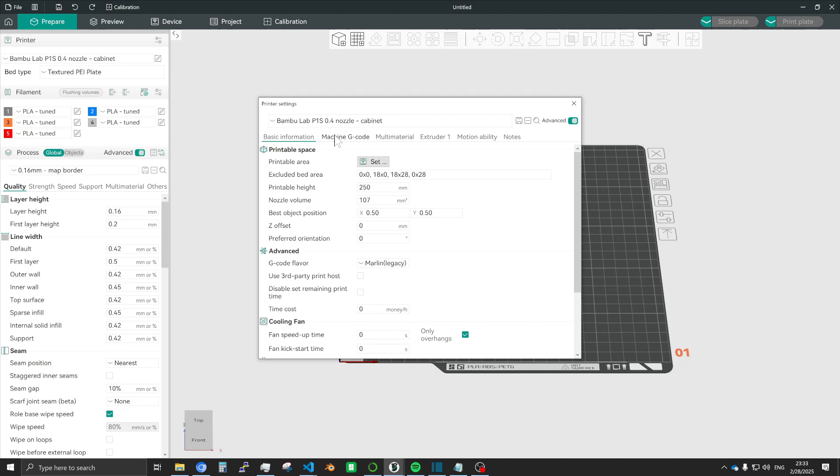You'll need to change some printer settings in your slicer so that MFM can find certain features inside your G-code. Go to your printer settings in your slicer and click the Machine G-code tab. Scroll down to find the Layer Change G-code option, and at the very end of Layer Change G-code, type in ;MFM Layer Change End. Next, go to the Change Filament G-code, and at the very beginning, add the line ;MFM Tool Change Start.

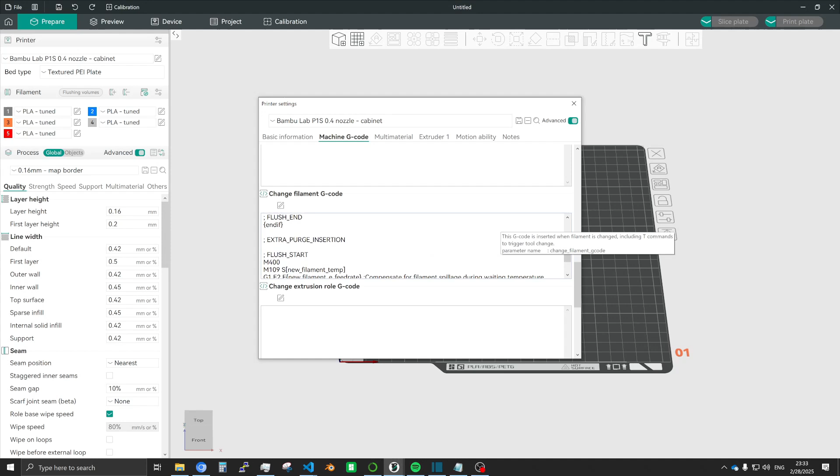Then go down until you find the last flush sequence for your printer. And in this case for a Bambu printer, it's right before the last flush start. Type in ;extra_purge_insertion. Then go to the very end of Change Filament G-code and type in ;MFM Tool Change End. Then save your printer settings. These steps are listed on the GitHub under Slicer Setup.

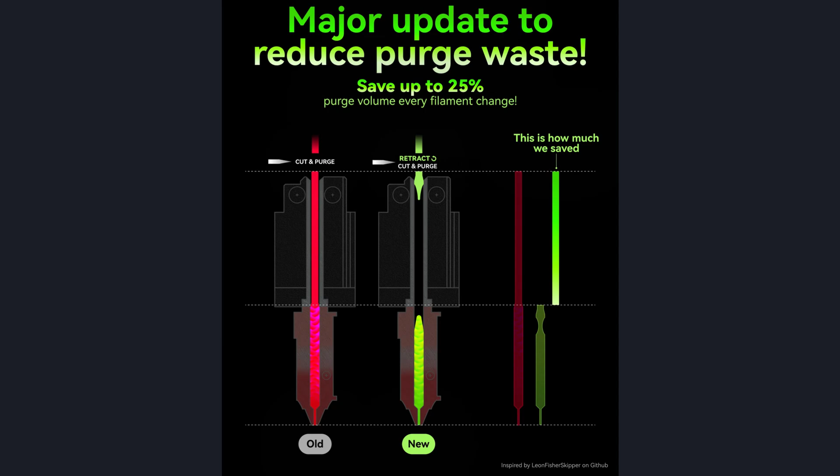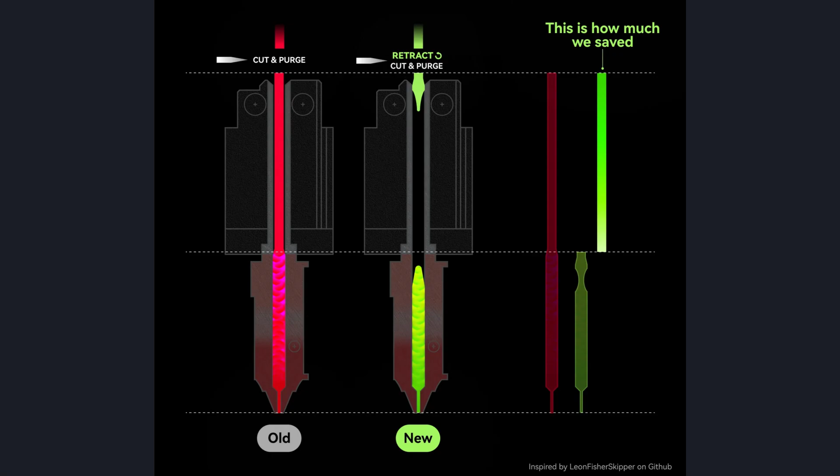Printers with a single nozzle can reduce filament waste with the long retraction on cut feature. By retracting the old filament before cutting, the retracted length of filament does not need to be purged when the new filament is loaded. To turn on long retraction on cut, go to your filament settings and go to the Settings Overrides tab. Check the long retraction when cut checkbox and save your filament settings.

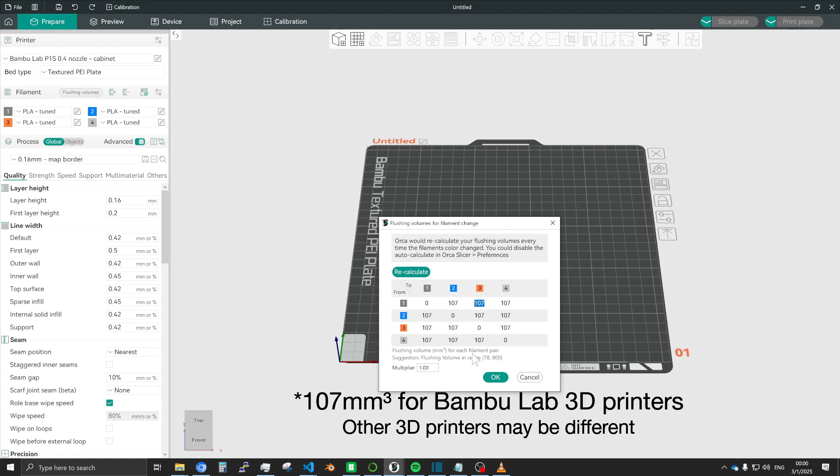I recommend that you decrease your flushing volumes to 107 millimeters cubed. This is the minimum flushing volume needed to push filament between the cutting location and the nozzle. If you need additional flushing volume for certain color transitions, you can specify that in the Map Feature Modifier options.

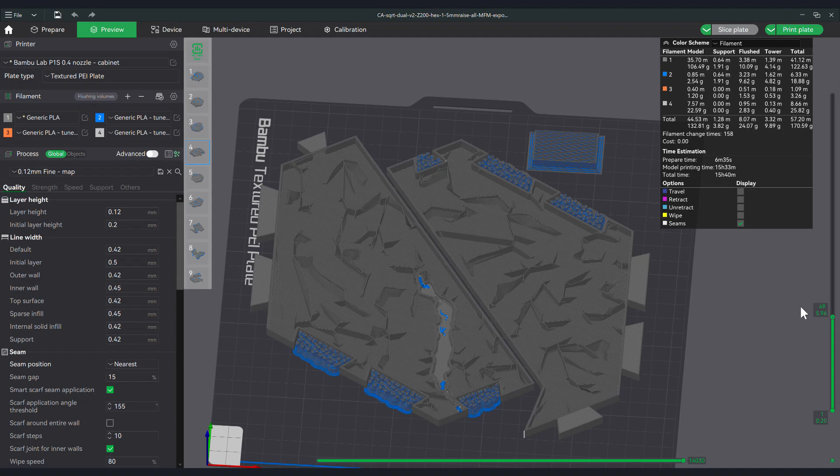Map Feature Modifier optimizes printing order as well as reuses existing tool changes and prime towers in order to decrease the amount of added tool changes and flushing volume in the final code. This results in faster prints and less plastic used.

You also need a minimal tool change file, which can be found inside the minimal tool changes folder on the GitHub. Inside, there are minimal tool changes for many common printers, and the current recommended file for the Bambu X1/P1 series is the one labeled long retraction with 107 millimeters cubed of flushing volume. These minimal tool changes provide tool change functionality for color changes when there are no tool change and prime towers available for reuse in slicer-generated G-code.

The first two options, Model to Real World Default Units and Model 1 to N Vertical Scale, describe the scale of the model to real world. In this example, 1 millimeter in the model is just 1 millimeter in the real world, so we'll set these options to 1. If we used millimeters for model units and meters for real-world units, model to real-world default units would be set to 1000.

Model sea level base thickness is the height of the model that corresponds to sea level in real life, which is 0 elevation. The isoline options control where isolines, also known as elevation contour lines, will be placed. In this example, the isolines will start at 5 millimeters in real-world units, continuing every 10 millimeters and ending at 50 millimeters. This means that there will be a contour line at 5 millimeters, 15, 25, 35, and 45 millimeters.

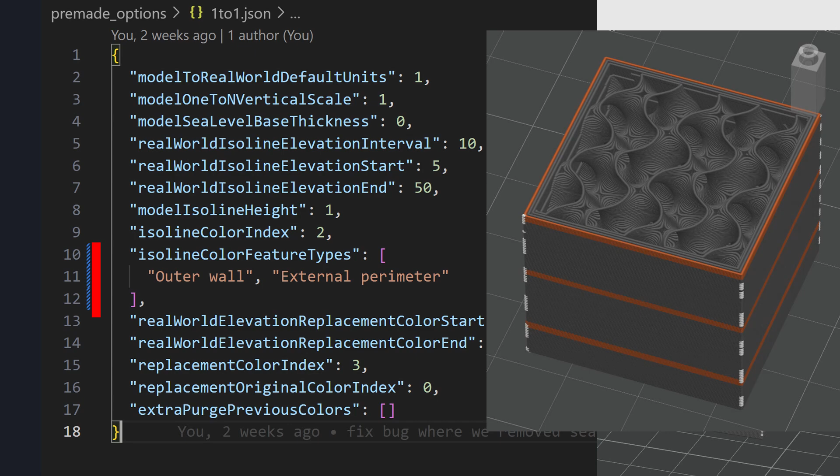Isoline color index is the isoline color identified by the slot number. Isoline color feature types represent the generated printing features that will be recolored as isolines. In this example, the outer wall and external perimeter will be recolored. External perimeter is the term used by Prusa, and outer wall is the term used by Bambu and OrcaSlicer.

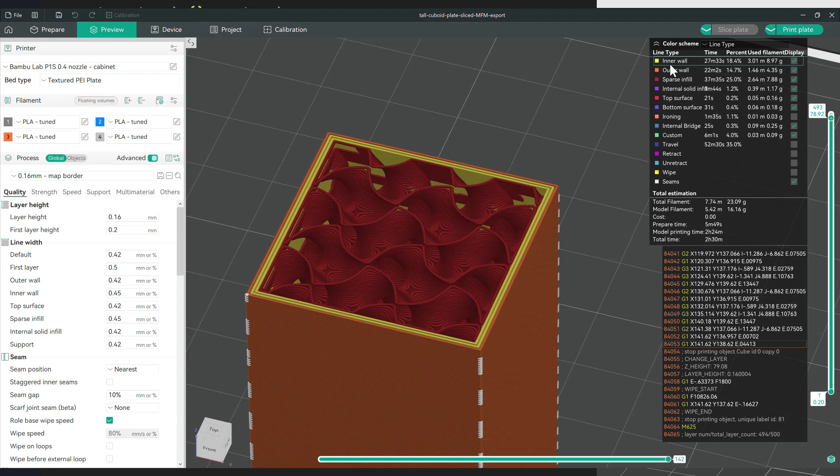In this color-coded preview, the outer wall is orange, the inner wall is yellow, the infill is red, and the top surface is shown as a light red. Real-world elevation replacement color represents the color replacement's color range. In this case, it's from 30 millimeters going up to 60 millimeters. The replacement original color index will be replaced with the replacement color index for the duration of the color replacement.

Instead of having a matrix to show flush volumes in the slicer, we actually only need to know the previous color of a tool change to determine if we need extra purging volume. Colors that often need extra purge as the previous color in a tool change are dark colors and shiny colors. The option Extra Purge Previous Colors is a list of these colors. I've created options files that fit my released 3D printed maps. These options files can be found in the pre-made options folder on GitHub.

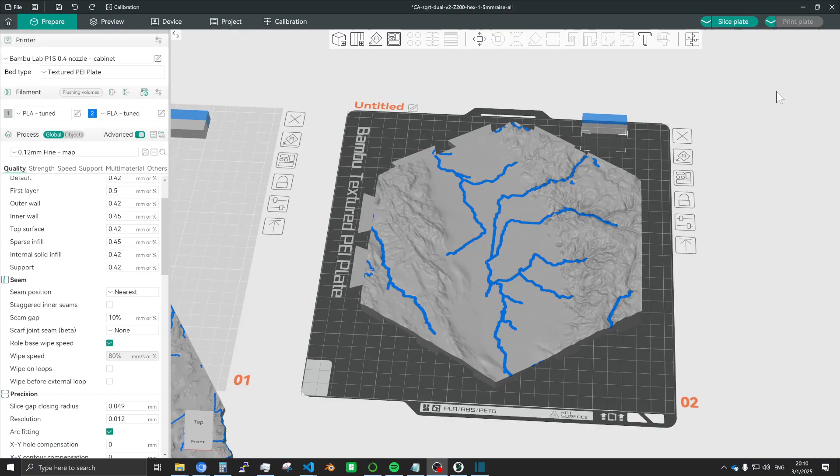After slicing our sample model, in the upper right-hand side, we can click the drop-down menu and select Export Plate Sliced File. If you use Bambu Studio, you need to go to the File menu in the upper left-hand side to find the Export Plate Sliced File and Export G-Code options.

Open the MFM application that you downloaded from GitHub. Select your input printing G-Code or plate sliced file, your MFM config options, your minimal tool change G-Code, and you can also set your output G-Code path if needed. Then click Post Process. This will take a few minutes to complete if your model is very big.

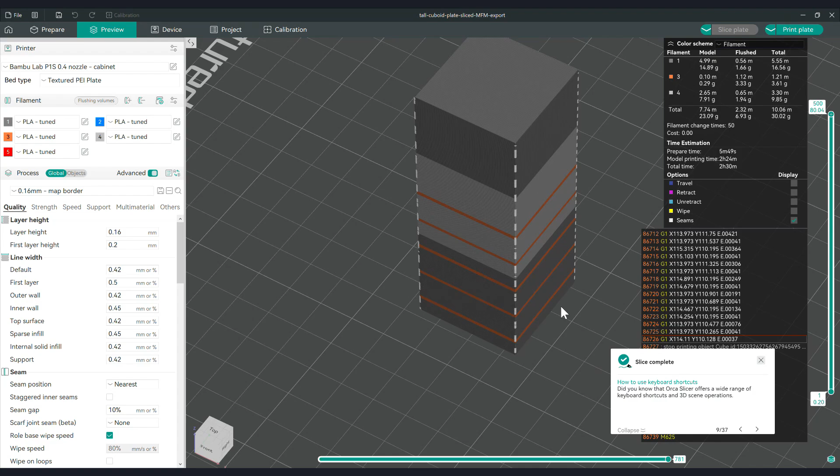Drag the MFM exported plate slice file or G-code back into your slicer. There you can preview the final print job with your new features added. You can use the slicer's send or print features to send directly to your printer if your printer supports it. Back to our sample file. Only the outer wall is recolored at the isoline heights as specified in our options. The infill remains the same.

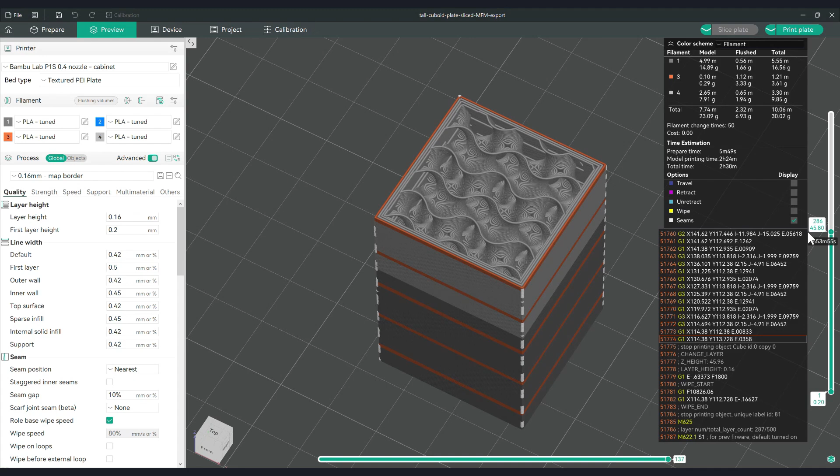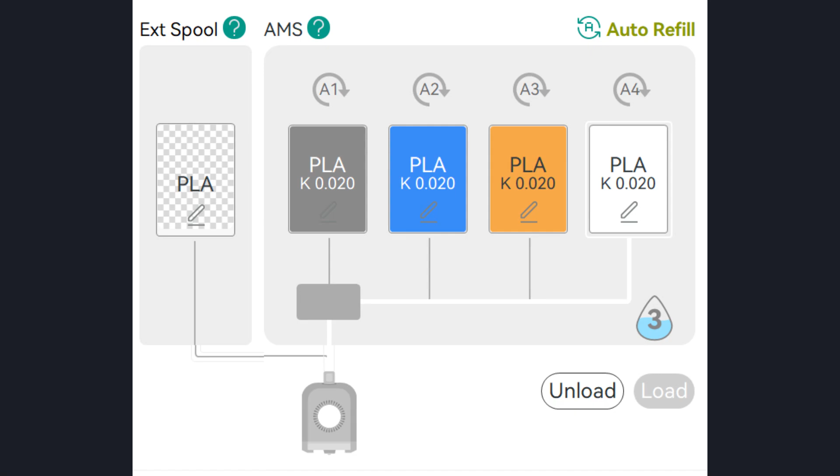Here's an example of what the map model preview should look like once the isolines and color changes are added. You can remap the AMS slots on the print screen if you're using a Bambu printer. Make sure every AMS slot is assigned a different color to avoid automatic filament backup. You can also move the G-code file to an SD card to print directly from your printer. If the additional colors don't show up in the preview, make sure you added the additional filament colors before you exported the G-code or plate sliced file from your slicer.

Map Feature Modifier also comes in the form of a slicer post-processing plugin so that it runs automatically after slicing. It works in PrusaSlicer, Bambu Studio, and OrcaSlicer.

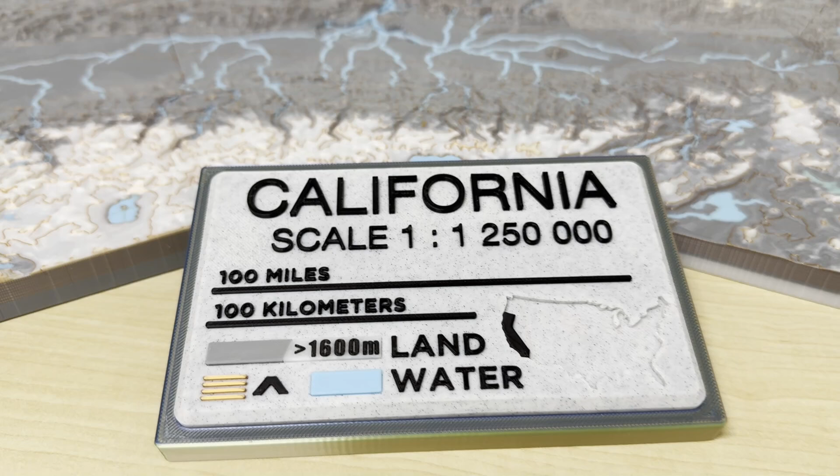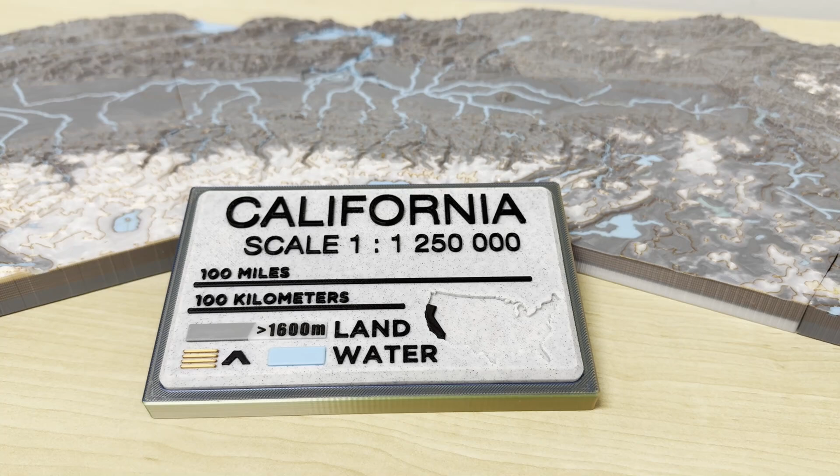I've also created a scale and legend for this map. In this we show the scale bar, the land colors, as well as the high elevation color over 1600 meters, the contour lines in copper, as well as the blue water. And some people have had some confusion. So this scale is for this large map here and not that small California outline.

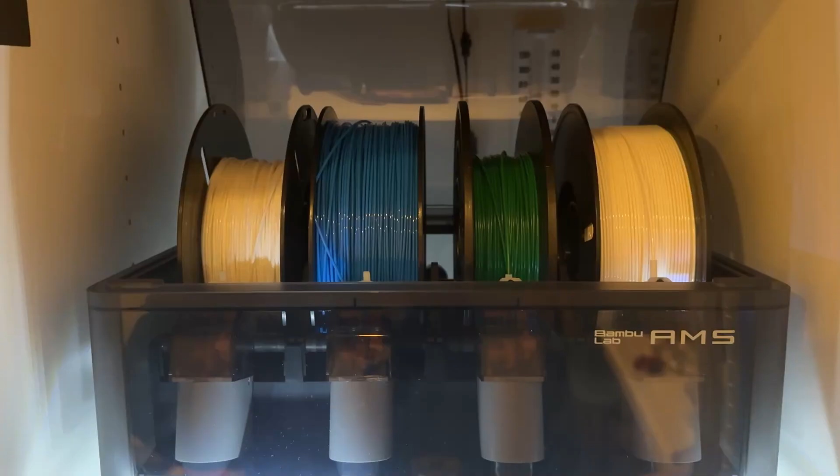I got the same color on the same side of each of these objects by positioning the objects on the build plate in the same orientation that they were generated in, so that each time the filament prints, the green will always be exposed on the side facing us right now. And also, on the other side, we will have purple facing the side that was facing away from us, as well as blue, if we look at it this way. For numbering the 4 slots of the AMS, it's T0, T1, T2, and T3.

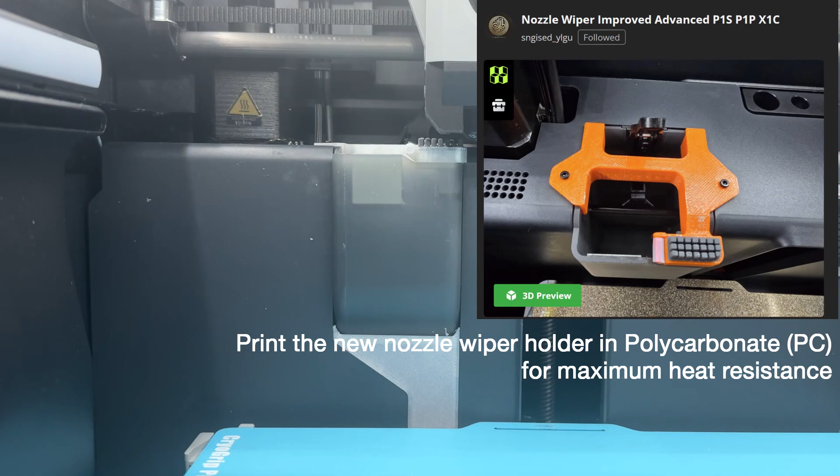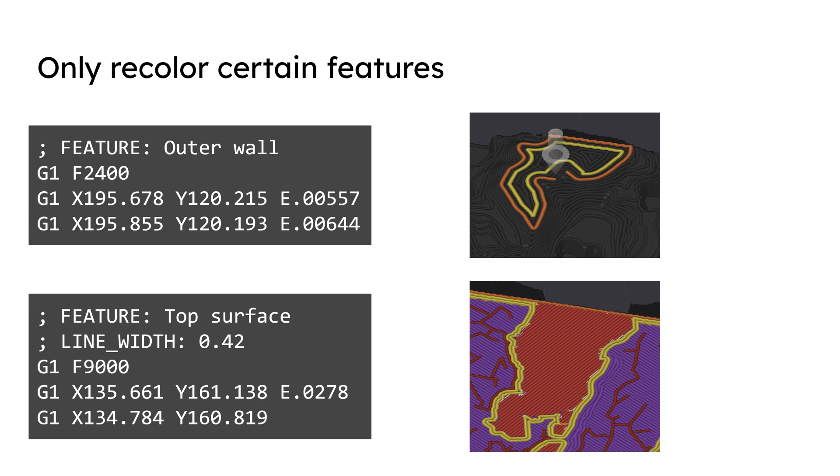You might be thinking, hey Anson, why don't you just find and replace the tool indexes? When you recolor entire layers, you'll end up with an oil slick effect when top surfaces line up perfectly with isoline layers. So instead of being layer aware, we need to be feature aware so that we can selectively recolor certain features such as the outer wall and ignore the top surfaces.

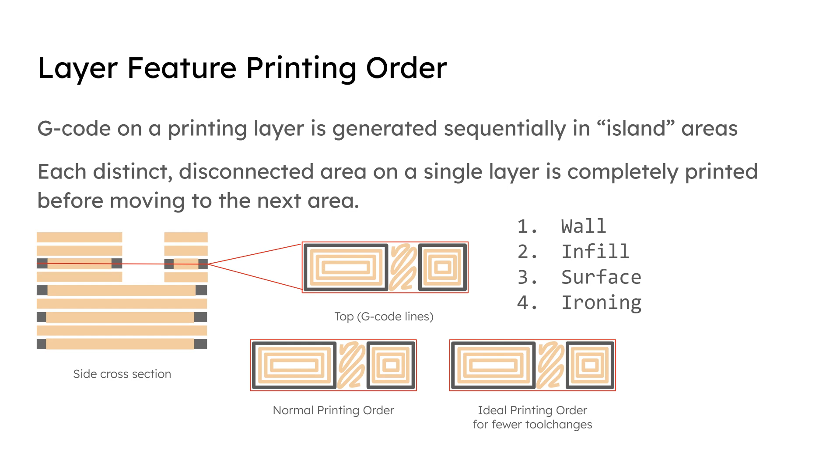Slicers tend to print islands completely, meaning that the outer and inner wall and infill of a disconnected area is completely printed before the outer and inner wall and infill of another disconnected area is printed. So you're probably seeing the issue already. If we recolor only the outer walls, we need to do a tool change every single time we switch to another island. In addition to being feature aware, we need to make our feature G-code relocatable and modifiable, in addition to tracking state throughout the entire post-processing.

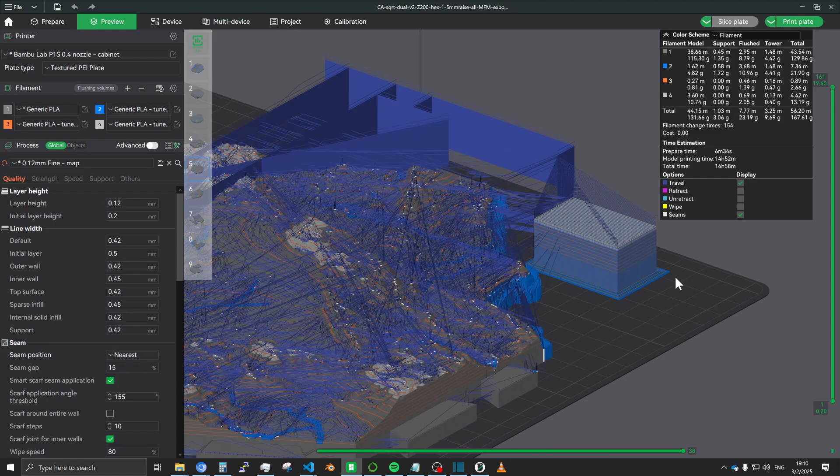We reuse existing tool changes and prime towers, as well as add our own in order to take advantage of slicer optimizations and reduce wasted plastic. We end up reordering the printing features so that the outer walls of the same color all finish printing before moving on to the inner walls. It gets even trickier when features cross layers.

For the assembly developers out there, yes, this is a framework for isolating and injecting G-code gadgets. I love the attacks, I love the defenses, because what they prove is that gadgets are eternal.